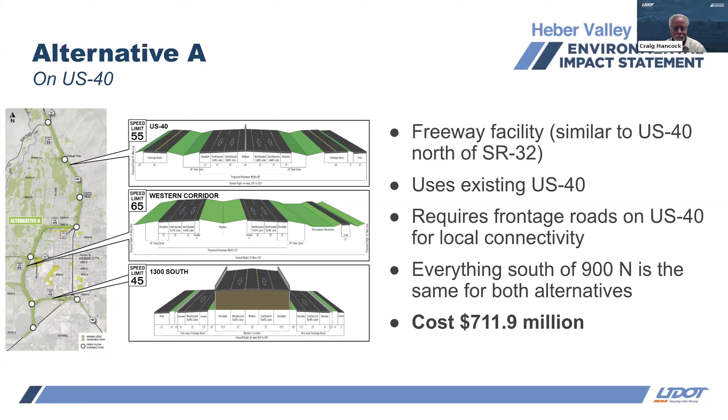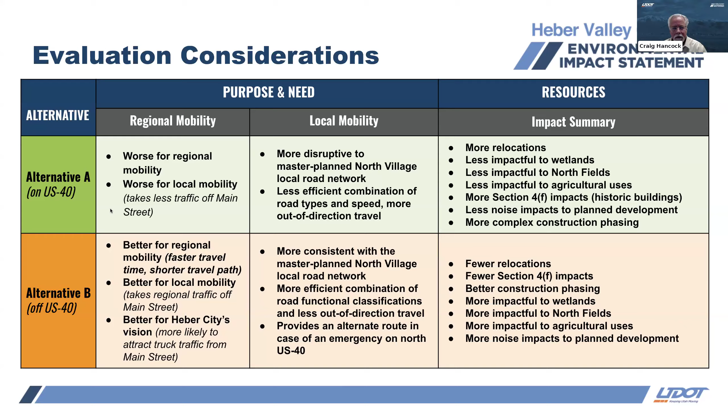UDOT has identified Alternative B as the preferred alternative. I would like to highlight a few reasons why.

First is best for regional mobility, offering faster and more direct travel. Alternative B is about 15% faster than Alternative A, depending on the route.

Because Alternative B offers a more direct travel route and better travel times, it does a better job of attracting traffic from Main Street, which is why it is also best for local mobility. It provides the best traffic operations on Main Street with fewer failing intersections and shorter queues on Main Street.

Alternative B would pull more regional and truck traffic off of Main Street with less cut-through traffic on local roads as compared to Alternative A. We've heard that this is important to the community. Overall, Alternative B is projected to attract about 30% more traffic to the corridor west of downtown Heber City compared to Alternative A.

Another reason to highlight is that Alternative B significantly enhances the overall transportation system by providing a dedicated alternate route to US 40 between Potter Lane and 900 North.

This means that this alternative can accommodate a higher volume of regional traffic, which in turn permits the existing North US 40 to better serve the needs of the local traffic. This separation of local and regional traffic is key to improving both mobility and safety for all drivers.

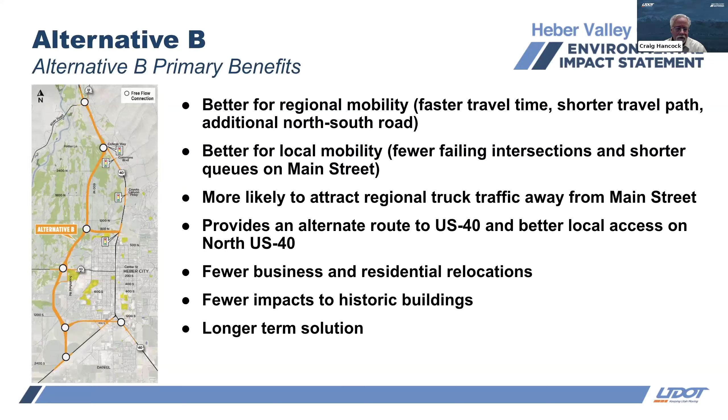The main drawbacks with Alternative B are the greater impacts to wetlands and farmlands in the North Fields. Throughout the study, UDOT has heard from the public and local government officials that they desire to protect the North Fields as open space. In response, and as a commitment to the community, UDOT is making two significant environmental commitments in the environmental document.

First, the Heber Valley Corridor will be a limited access facility under UDOT's jurisdiction. There would be no access allowed beyond the interchanges and ramps identified in the draft EIS. This includes extensions through the North Fields for Alternative B.

UDOT is committed to no additional interchanges between Potter Lane or College Way and SR 113 being built in the North Fields, other than the 900 North connection, which is not an access point. It just connects the new corridor to US 40. This lack of access will reduce the potential for induced development in the North Fields.

Second, UDOT will strive to mitigate up to 100% of the impacts of the impacted wetlands by establishing a wetland mitigation in the North Fields. Both alternative A and B would require wetland mitigation. Mitigation ratios typically begin at 2:1, where 2 acres of mitigation are provided for every acre of impact, and could increase from there depending on various factors.

Once designated, wetland mitigation sites have the potential to limit sprawl based on where they are located because they are protected in perpetuity and cannot be developed.

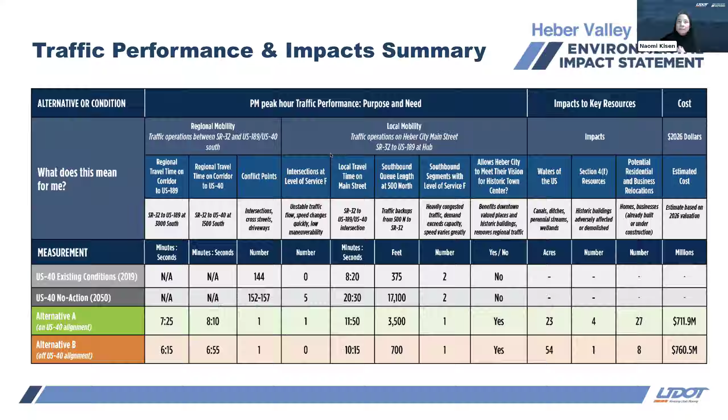So we prepared some visual simulations of the alternatives to give you all a sense of what the alternatives would look like at key locations. If you'd like to look at these some more on your own, they can be found in Appendix 3.0 of the draft EIS, or also on the display boards and maps available on our website.

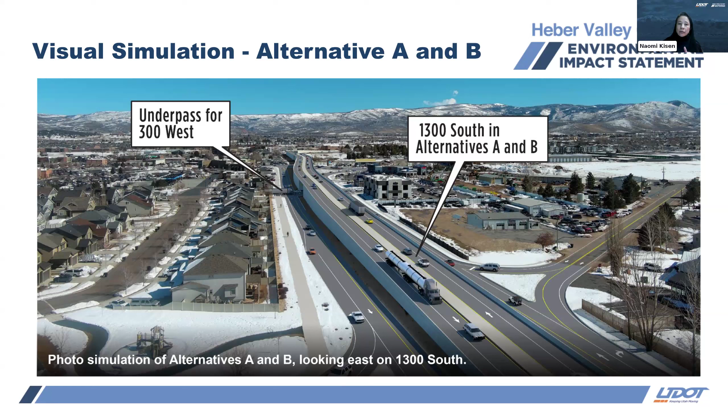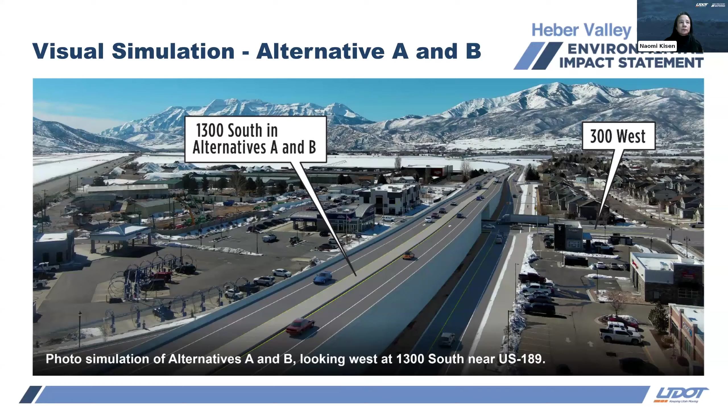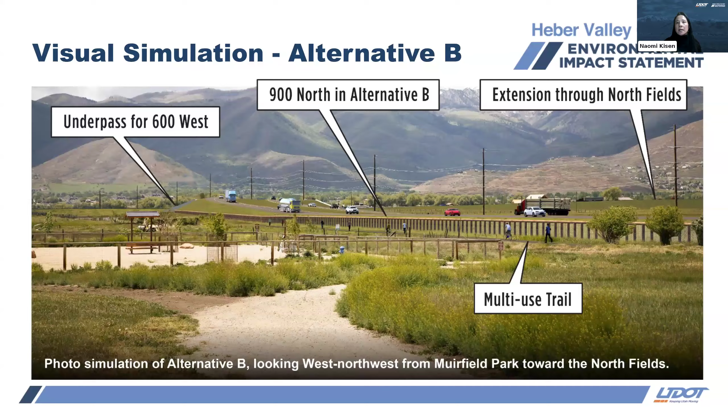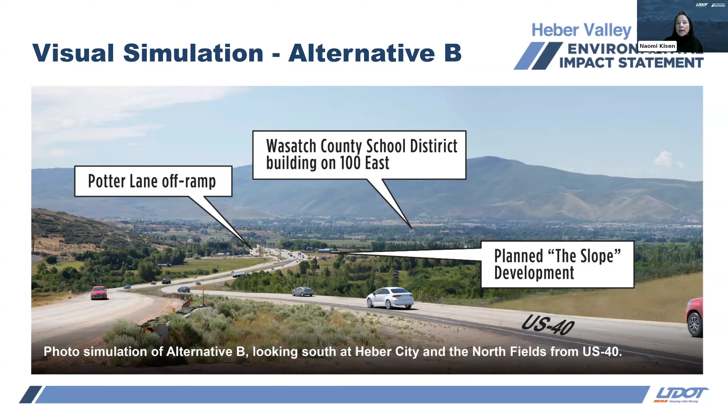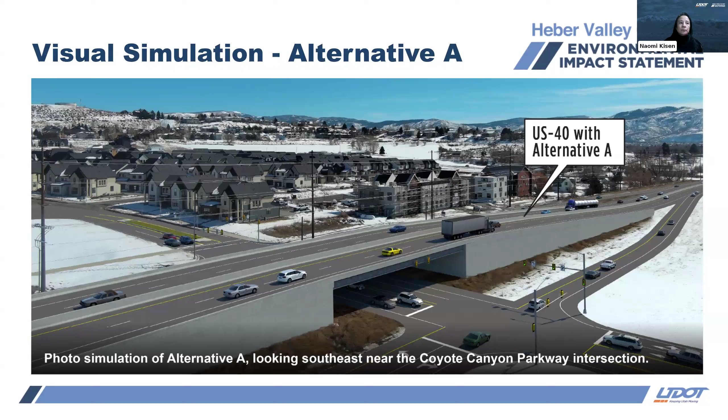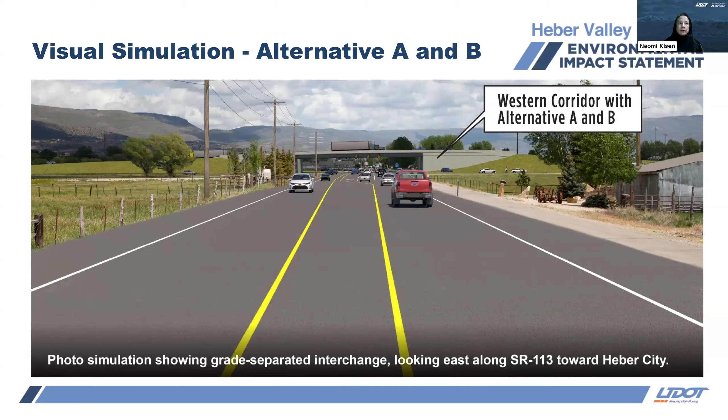Now we're going to pivot a little bit to talk about noise. For both action alternatives, noise levels for receptors, which are things like homes, businesses, parks, and schools, would be higher than with the no action alternative.

It's worth noting that for our analysis, we included both existing receptors and future receptors. Future receptors are planned development that is approved but not yet built. Alternative B would result in more total noise impacts compared to alternative A. However, many of those impacts are to those future planned developments that have not yet been built.

A total of 24 noise barriers were evaluated with alternative A and alternative B. Alternative B had 3 noise barriers that met the feasibility and reasonableness criteria and were therefore recommended for balloting, which will occur during the final design time for the project.

Alternative A had 4 noise barriers that met the feasibility and reasonability criteria. 3 of these are the same as for alternative B, but there would be 1 additional wall on the south side of 900 North near US 40.

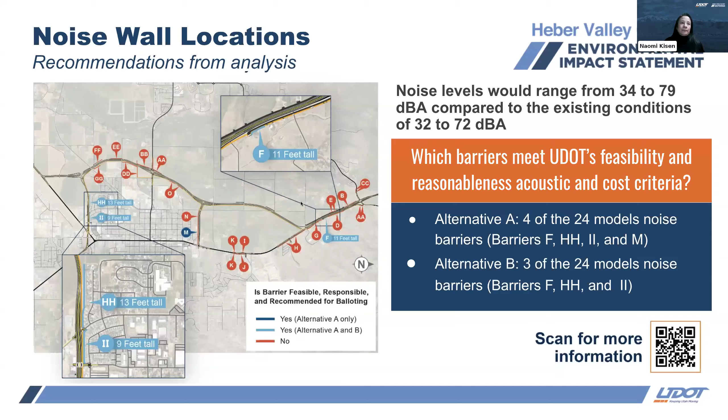A little more about this process that we're in right now. As you all know, we're in the middle, not quite the middle, of the 60-day formal public comment period. 60 days is the maximum time that we are allowed to provide for public comment based on current federal law. The comment period runs until March 9th.

They do help inform our decision, however. They're one of many inputs that we'll use to inform updates to the final document and our decision regarding the project.

Primarily, comments are used to consider things that we might have overlooked. So mentioning things about property impacts or environmental impacts that have been overlooked is helpful. Comments are definitely more impactful when they're solution-oriented.

There are several things that help make a great comment. One is if you clearly identify the issue or resource you're concerned about and reference specific sections or topics in the DEIS. Also include any data, citations, observations, or personal experience that support your comment. Comments can also be in the form of questions, in addition to just statements.

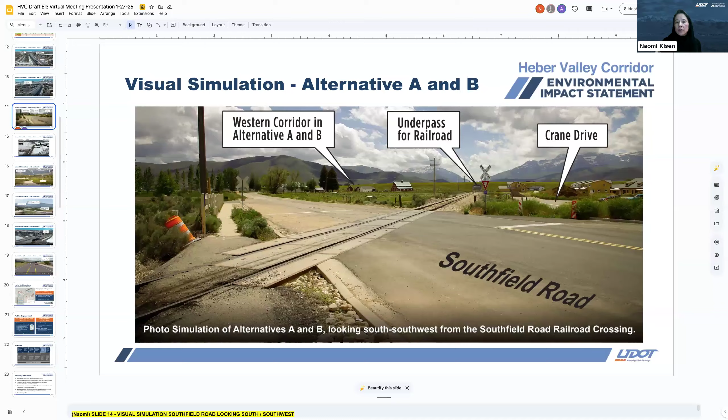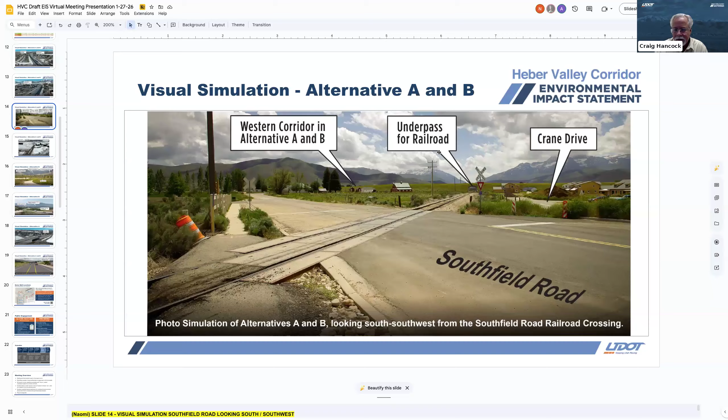I'm not sure if this is exactly the viewpoint the question centers around, but this does show standing at the crossing at Southfield Road, looking towards the southwest, and you can see the underpass for the railroad and how the corridor goes over the railroad there. This, of course, would be the same for alternatives A and B.

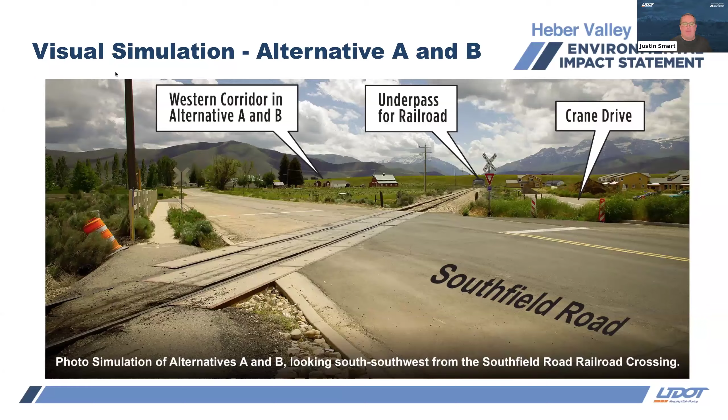Great. Next question: why not use 189 instead of 1300 South for an existing entry to the bypass? This is affecting our current community, not future planned developments.

Sort of a design, perhaps traffic question. One of the things that was key for this design is to have a really good connection between the western corridor and South US 40, and the more direct connection lends it to be much better. It functions a lot better to draw that traffic off of the Main Street area, and it's a more direct path to draw traffic off of 40 and Main Street onto the bypass.

One thing that has come up in conversations I've had with residents and other stakeholders in the valley is that 1300 South was identified -- I'm going to get the date wrong, I think in the 1990s. Is that correct? I'm looking to the team. 2007, 2006, early 2000s -- as a corridor there for a future connection, and has been on the transportation plans, the approved plans for the valley since that time.

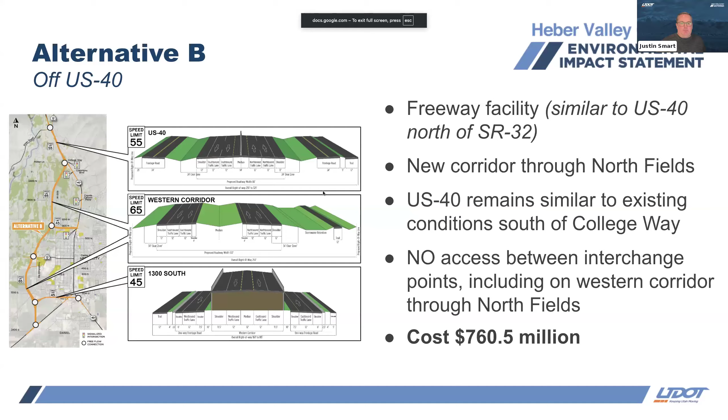I'd just like to turn the time over to Craig for some final remarks, but I just want to say thank you. Again, the involvement of this community has been outstanding throughout the whole process, and the DEIS process has been no exception. So with that, Craig, I'll turn it to you for any final words.

Yeah, no, I echo those sentiments, Justin. Our team has been involved with this for a number of years now, we've done a lot of work. But this time now, the next 60 odd days until March 9th, it's really our time to sit back and listen to your comments and hear your questions. We're really grateful for the comments and questions we've gotten this evening and the comments we've received so far. We really look forward to seeing more of you and hearing from more of you tomorrow and throughout this comment period. This has been super beneficial and helpful for us.